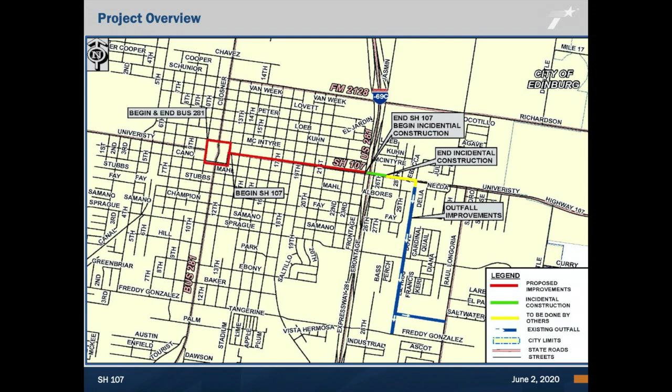The scope of the proposed project includes reconstructing and converting Business 281 around the courthouse square to one-way traffic operation, reconstructing SH 107 within existing right-of-way, upgrading the existing storm drain system, and widening an existing ditch to improve roadway drainage. The project is needed because there is a decrease in mobility, the traffic is slow and congested, and there is a high crash rate. The purpose of this project is to improve mobility, reduce congestion, and improve safety.

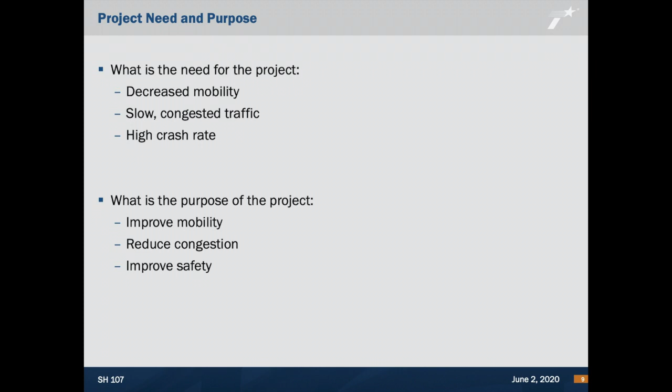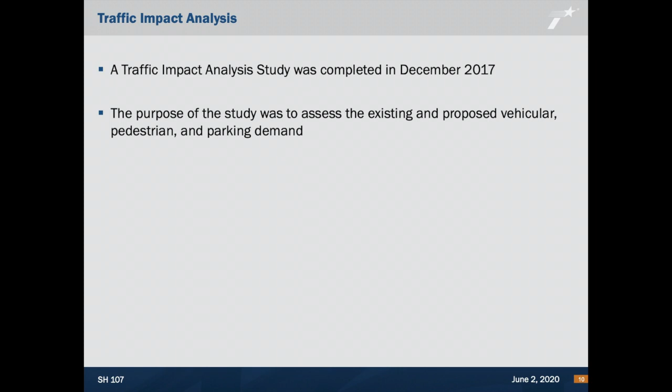As part of the preliminary analysis of the courthouse and surrounding area, a traffic impact analysis study was completed in December 2017. The purpose of this study was to assess the existing and proposed vehicular, pedestrian, and parking demand in the area. The results of the study are summarized here.

There is an increase in demand due to the new Hidalgo County Courthouse, and also because the Edinburg Downtown Master Plan will require improvements as development occurs. The quality of traffic flow on the future street network would deteriorate without improvements. The existing two-way traffic operation would not be able to handle future traffic demands. A one-way traffic operation around the square would provide an acceptable flow of traffic for present and future years.

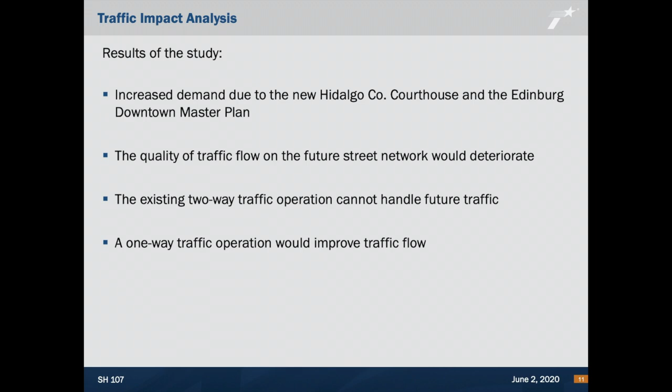Let's take a look at this table. Over an 8-year period between 2010 through 2017, there has been a total of 654 crashes within the project limits. The total number of crashes each year shows a steady increased rate of crashes, with a high rate of those being intersection crashes. The small table at the bottom of the slide shows the average crash rates in the state of Texas and in the Pharr District.

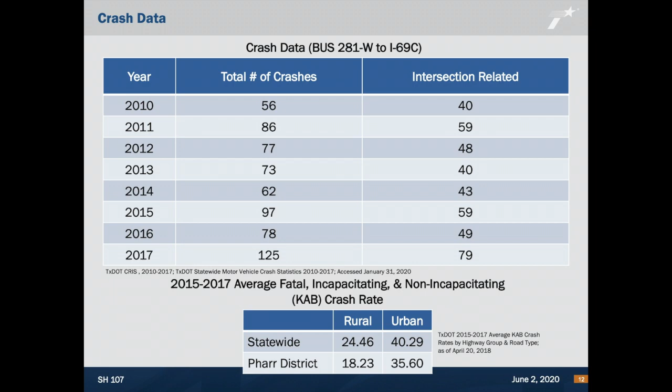Comparing the crash data on this urban roadway for the years 2015 through 2017, you can see that the total number of crashes for each of those years is well above both the statewide and the Pharr District average rates.

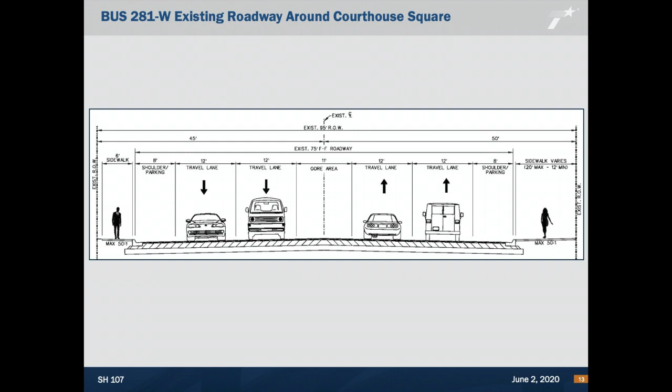The existing Business 281 around the courthouse square is a 75-foot wide road with two-way traffic operation. The roadway consists of 4 12-foot wide travel lanes, 2 8-foot wide shoulders, an 11-foot wide gore area approaching the intersection, and varying 6 to 12-foot wide sidewalks on both sides of the roadway. All of this within a 95-foot wide right-of-way. Drainage is currently handled by an underground storm drain system.

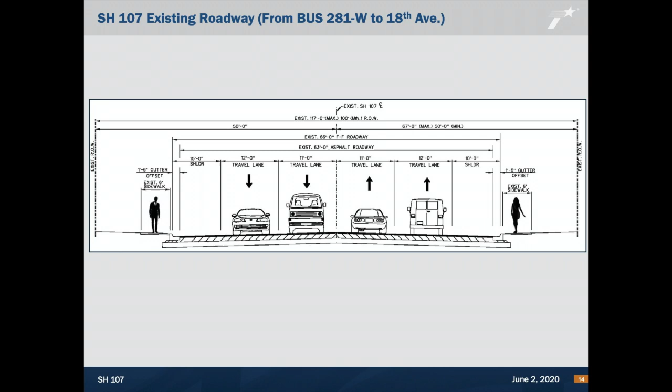SH 107 from Business 281 to 18th Avenue is an existing 66-foot wide roadway consisting of 2 12-foot wide travel lanes, 2 11-foot wide travel lanes, 2 10-foot wide shoulders, and 6-foot wide sidewalks on both sides of the roadway, all within a 100 to 117-foot wide right-of-way. Drainage is provided by an underground storm drain system.

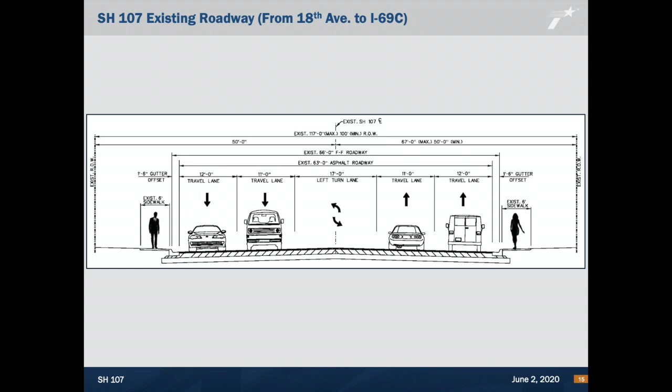SH 107 from 18th Avenue to I-69 is similar to the previous section, however, it includes a left turn lane instead of shoulders. The existing 56-foot wide roadway consists of 2 12-foot wide travel lanes, 2 11-foot wide travel lanes, a 17-foot wide left turn lane, and 6-foot wide sidewalks on both sides of the roadway, all within a 100 to 117-foot wide right-of-way. Drainage is provided by an underground storm drain system.

Two alternatives were studied and considered for this project: the no-build and the build alternative. Evaluation criteria of the alternatives considered impacts to the human and natural environment. The no-build alternative is required for consideration during the environmental study and is carried forward as a baseline for comparison.

Under the no-build alternative, the existing roadway would not be reconstructed or improved. The existing conditions of the roadway would remain the same. No improvements will be made to congestion or safety. The no-build alternative is not recommended because it would not meet the need and purpose of the project.

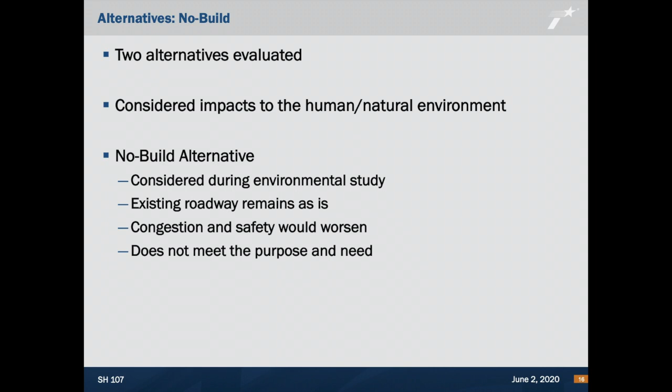The build alternative would convert Business 281 around the courthouse square to one-way traffic operations. SH 107 will be reconstructed within existing right-of-way. The existing storm drain system will be upgraded. An existing ditch will be widened to drain stormwater runoff.

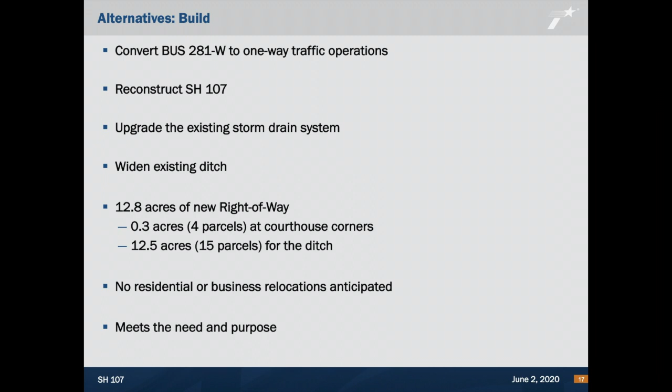These improvements would require a total of 12.8 acres of new right-of-way: 0.3 acres at the courthouse square corners, and 12.5 acres for the ditch. No residential or business relocations are anticipated. The build alternative meets the need and purpose of the project.

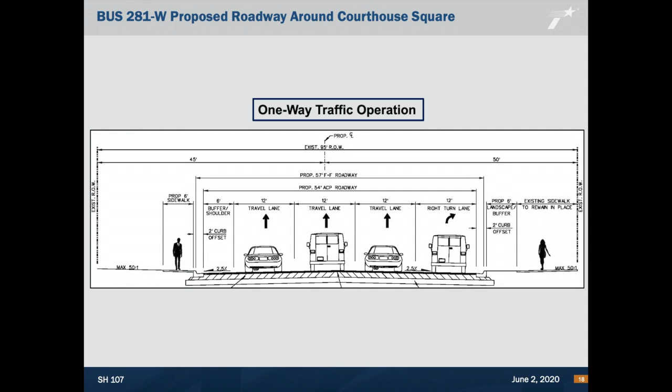Business 281 around the courthouse square will be converted to a one-way traffic operation. The proposed 57-foot wide roadway would consist of 3 12-foot wide travel lanes, one 12-foot wide right turn lane, and a varying 6 to 20-foot wide sidewalk on both sides of the roadway, all within the existing 95-foot wide right-of-way. Drainage will be provided by an underground storm drain system. A total of 0.3 acres of new right-of-way would be required at the corners to improve the turning radii.

SH 107 from Business 281 to 18th Avenue will be reconstructed to a 69-foot wide roadway, which would include 4 12-foot wide travel lanes, 2 10.5-foot wide shoulders, and 6-foot wide sidewalks on both sides of the roadway, all within an existing 100-foot wide right-of-way. The existing underground storm drain system would be upgraded.

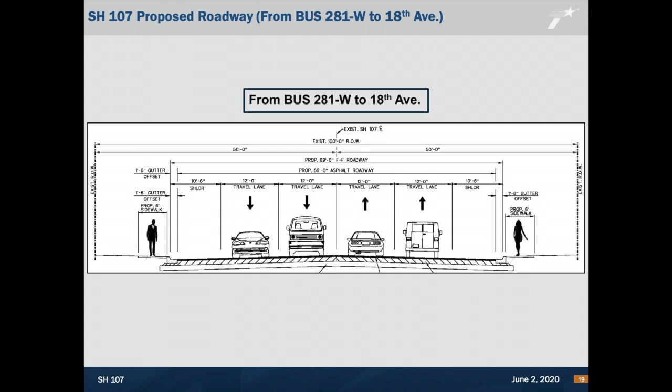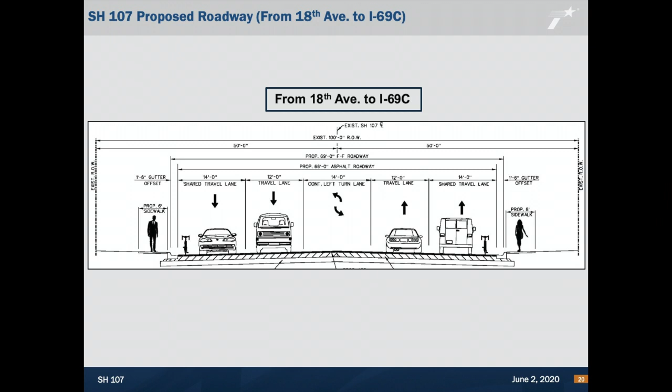SH 107 from 18th Avenue to I-69C will be widened to a 69-foot wide roadway consisting of 2 12-foot wide travel lanes, 2 14-foot wide shared use lanes for bicycles and automobiles, a 14-foot wide continuous left turn lane, and 6-foot wide sidewalks on both sides of the roadway, all within the existing 100-foot wide right-of-way. The existing underground storm drain system would be upgraded and improved. No new right-of-way would be required along SH 107.

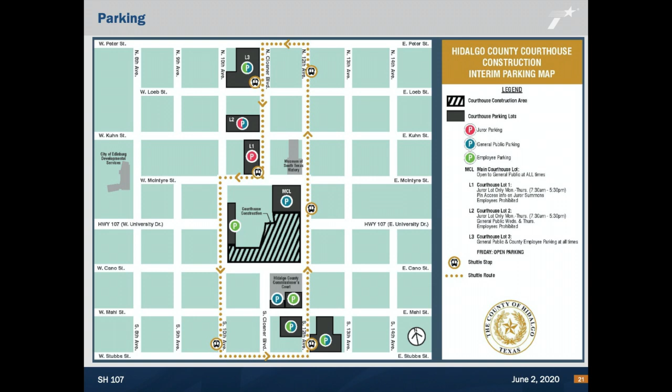Parking is not a part of the proposed project. However, we understand that the public may have questions or concerns regarding parking within the project area. Hidalgo County and the City of Edinburg completed a parking analysis study in 2018 in preparation of construction of the new Hidalgo County Courthouse. Parking along SH 107 and Business 281 has been previously removed. As part of a collaborative city-county plan, new designated parking lots and shuttle routes shown on the map have been implemented to address parking in the area. Should you have any questions regarding parking, please contact your city or county officials.

TxDOT considers effects to historic properties under state and federal regulations.

Because Hidalgo County has already reconfigured the street pattern around the square, and because the consultants will include protection notes in the plans for any work adjacent to historic buildings, the project would not have an adverse effect on historic properties.

The proposed project would include the widening of an existing ditch located approximately 350 feet south of the intersection of SH 107 and Rebecca Drive. The ditch runs south for 4,970 feet, then turns east for 1,636 feet to FM 1426, or Raul Longoria Road. The existing 60 to 80 foot wide ditch will be widened to a varying 85 to 137 foot wide ditch within a proposed 125 to 175 foot wide right-of-way.

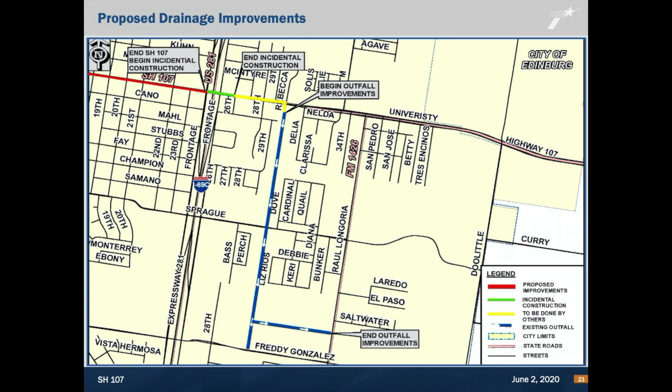A total of 12.5 acres of new right-of-way will be required for the ditch improvements. Hidalgo County will be responsible for purchasing the right-of-way. Hidalgo County Drainage District Number 1 will be responsible for maintenance of the ditch.

In summary, Business 281 around the Hidalgo County Courthouse Square will be converted to one-way traffic operation. SH 107 will be reconstructed within existing right-of-way. The existing underground storm drain system will be upgraded. The existing ditch located south of SH 107 and Rebecca Drive will be widened.

It is anticipated that a total of 12.8 acres of new right-of-way will be required for the project: 0.3 acres for the corners of Business 281 and 12.5 acres for the ditch. No residential or business relocations are anticipated.

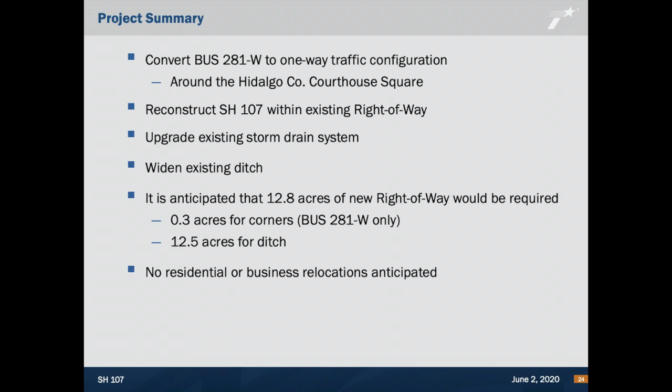Let me provide you now with information on the right-of-way acquisition process to be followed by the acquiring agency, which will be Hidalgo County Precinct Number 2 with TxDOT oversight. Property acquisitions will follow federal and state laws and policies. The Uniform Relocation Assistance and Real Property Acquisition Policies Act of 1970, known as the Uniform Act, is the federal law that is followed for appraisals, negotiations, and relocation of families and/or businesses.

Hidalgo County will be acquiring the additional right-of-way from individual property owners and relocate any families or businesses affected by the project. Independent fee appraisers will appraise each individual property needed as additional right-of-way.

Each affected property owner will receive a certified letter from the appraiser requesting a meeting with him or her in order to inspect the property, and provide them the opportunity to accompany them to perform a pre-appraisal inspection. They will also request permission to enter the property for inspection of improvements. The appraiser will determine the land value, improvement value, and damages to the remainder of the property to be acquired.

With the initial offer, a copy of the appraisal report will be provided. This will be forwarded to the landowner by certified return receipt requested mail, as dictated by state law. The project currently has available money for construction and right-of-way acquisition. The acquiring agency will start the acquisition process once the environmental clearance is obtained.

The property owner can accept the offer based on the appraisal or submit a written counteroffer based on information that can be supported by documentation such as appraisals or bids, which must be submitted by the property owner for review. If for some reason the property cannot be acquired through negotiations, Hidalgo County has the authority to proceed with eminent domain proceedings and continue with a special commissioner's hearing, but only as a last resort.

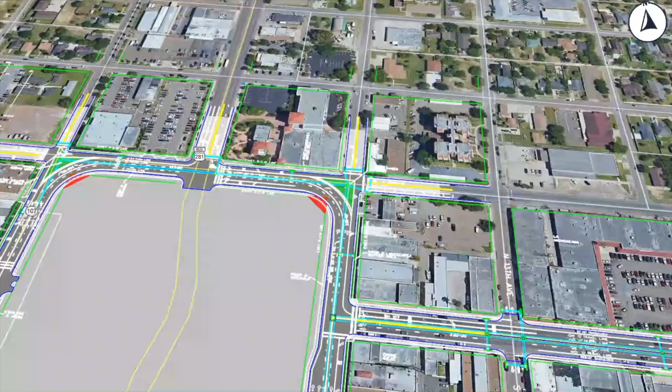At this time, a flyover video of the project will be shown to provide you a perspective of what the project will look like once it's complete. The flyover begins at SH 107 East as you are coming in from Interstate 69C or Expressway US 281. We will continue in a counterclockwise direction around the courthouse square. Continuing towards the north, you can see there are 3 travel lanes, all in a one-way direction.

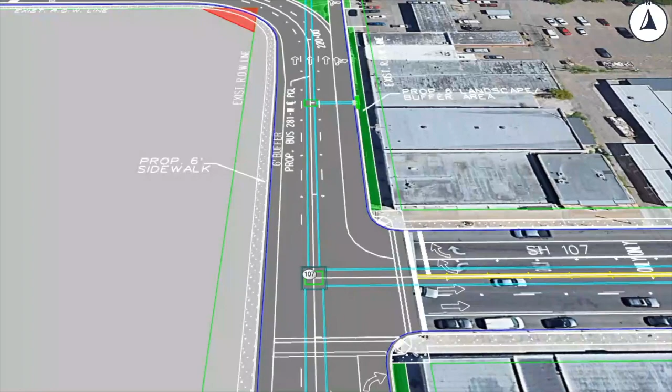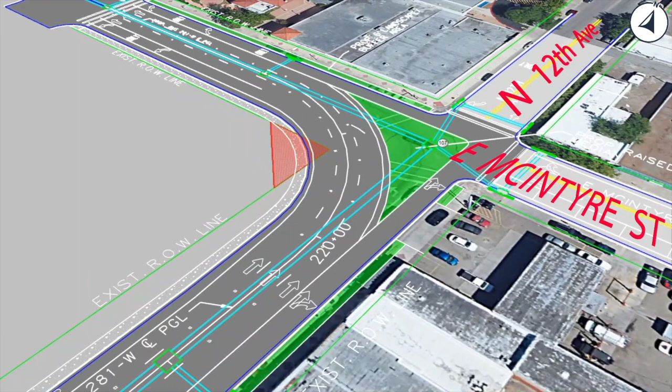The green areas throughout the square are landscape areas, buffers or medians, and sidewalks are shown in gray depicted with white dots. As you proceed, there is a right lane to exit the square. You can continue straight onto North 12th Avenue or turn right onto East McIntyre Street.

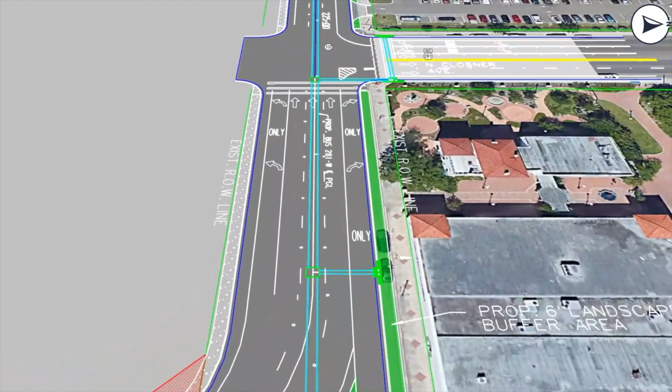The red shaded area on the left is a proposed right-of-way corner clip to accommodate the curve around the square going west. Continuing west, we now approach Business 281 or North Closner Boulevard on the right.

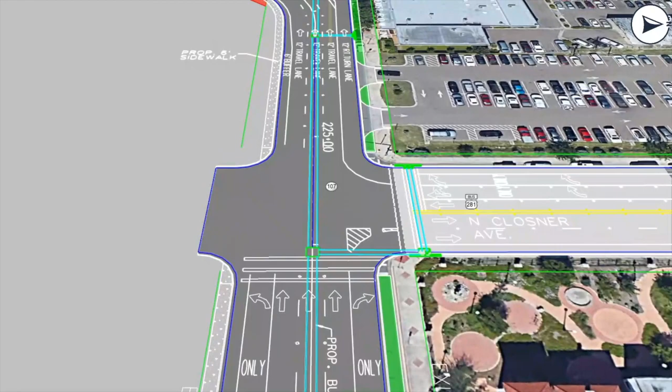You can see there is a left turn lane to enter into the courthouse driveway entrance, 3 lanes going straight, and 1 turning right onto North Business 281.

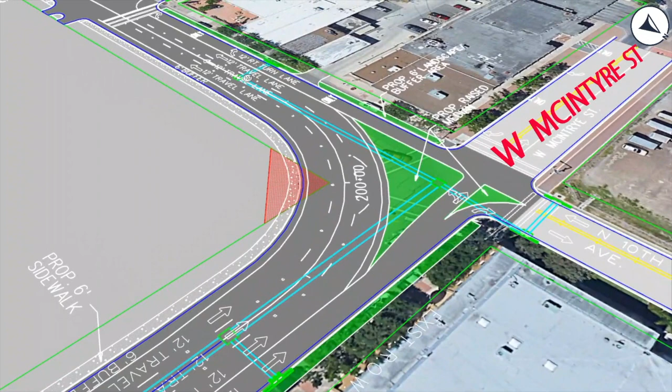As we approach North 10th Avenue, 3 lanes continue with 1 lane exiting the square. The lane continues straight onto West McIntyre Street and/or turns right onto North 10th Avenue. The red shaded area is the proposed right-of-way corner clip to accommodate the curve around the square going south.

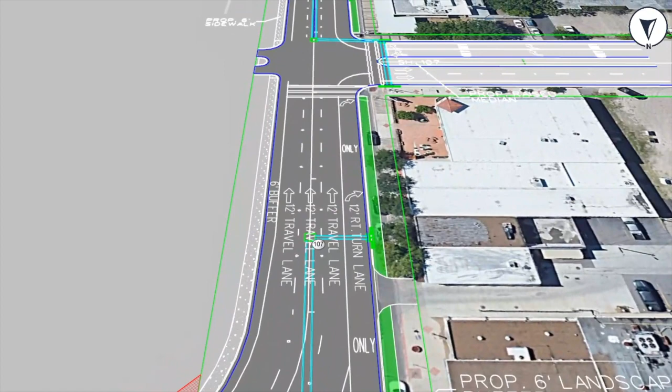We continue south with 3 travel lanes and a right turn lane as we approach SH 107 or University Drive. As we continue south and approach West Cano Street, 3 lanes continue with 1 lane exiting the square.

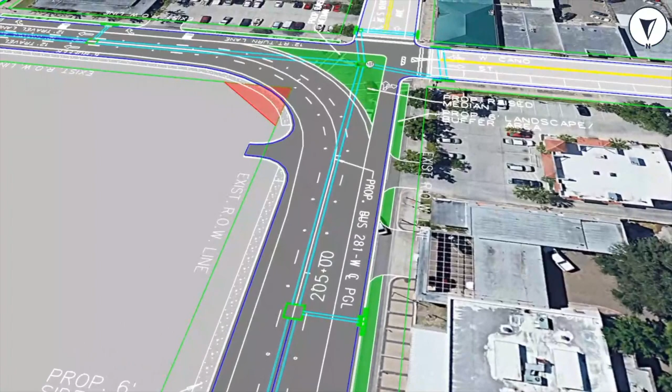The lane continues straight onto South 10th Avenue or can turn right onto West Cano Street. The red shaded area is a proposed right-of-way corner clip to accommodate the curve around the square going east.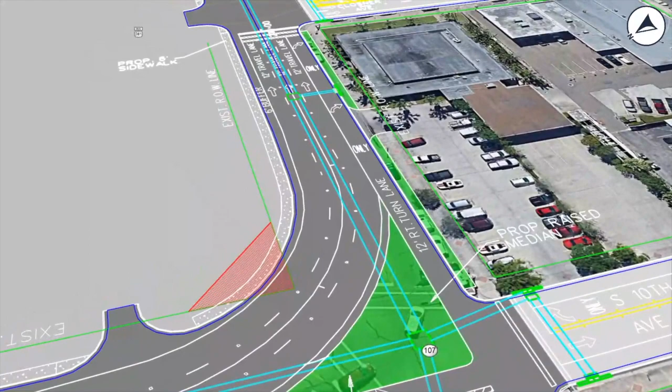We then continue east with 3 lanes and a right turn lane as we approach South Business 281 or Closner Avenue. As we continue east and approach East Canal Street, 3 lanes continue towards the north with 1 lane exiting the square.

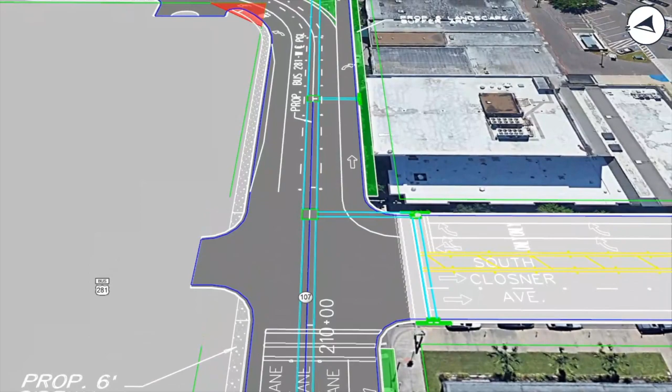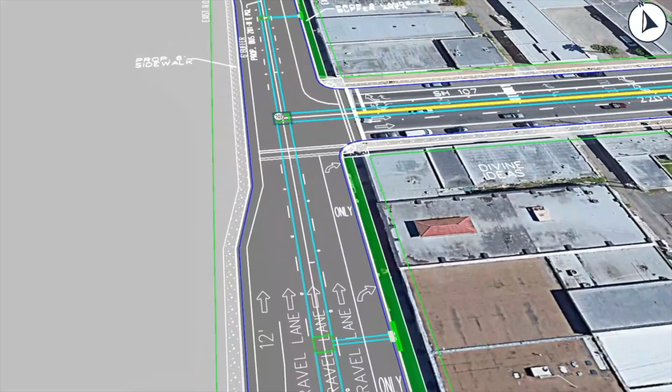The lane continues straight onto East Canal Street or turns right onto South 10th Avenue. You can see there's a left turn lane to enter into the Courthouse Drive entrance. The red shaded area is a proposed right-of-way corner clip to accommodate the curve around the square going north.

We are now back to SH 107 East where we originally started. We will now turn east onto SH 107. This portion of the project will be constructed entirely within existing right-of-way, shown here by the green lines.

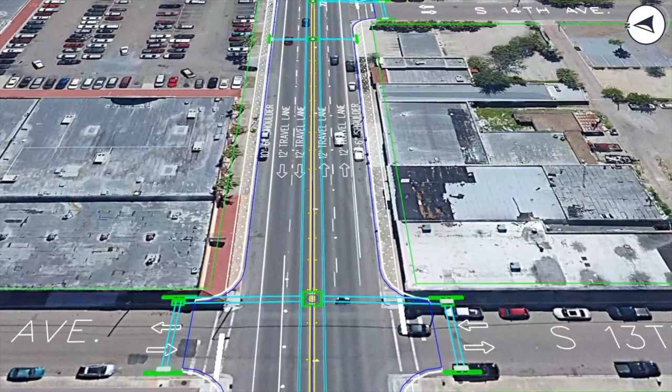As we continue east past 13th Avenue, you can see there are 4 travel lanes with shoulders and sidewalks on both sides of the roadway. As we continue past 15th Avenue, you may notice blue lines in the center of the roadway. This shows the location of the upgrade to the storm drain system being proposed within the project limits.

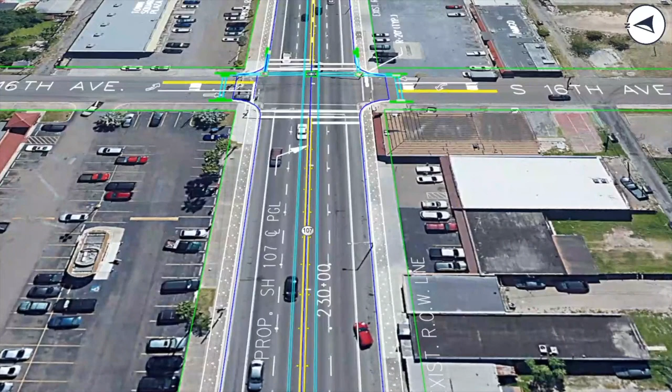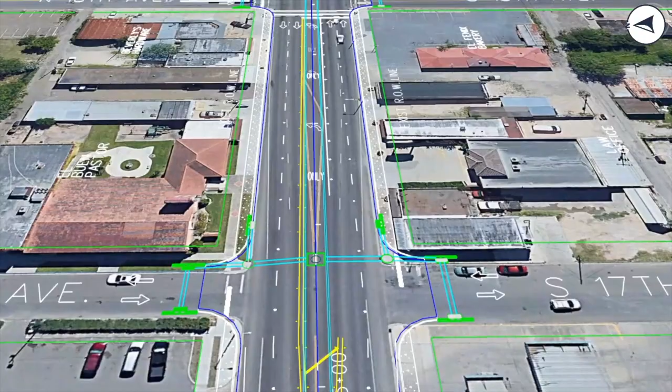As we pass 16th Avenue, you can see that the roadway transitions. The shoulders are eliminated and a center turning lane is added. The roadway would now consist of 4 travel lanes, a center turning lane, and sidewalks.

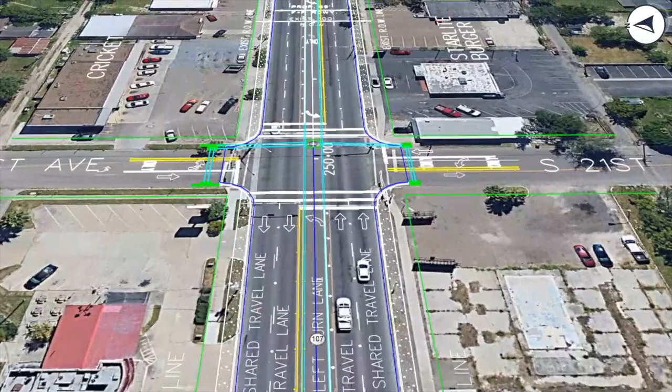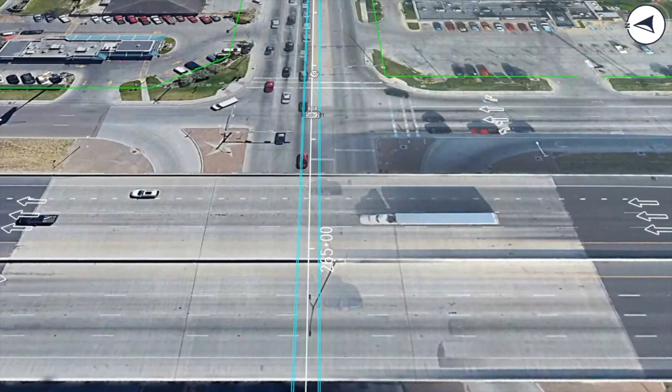The reconstruction of SH 107 ends at the Interstate 69C US 281 West Frontage Road. From the West Frontage Road east to 26th Avenue, the storm drain system, depicted by the blue lines, would transition to connect to TxDOT's existing storm drain system east of the expressway.

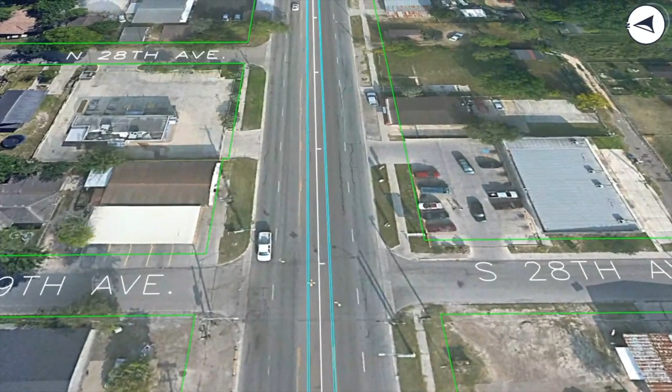The drain system would continue east to Rebecca Drive, then continue south to connect to an existing drainage ditch shown in purple. As part of this project, the existing ditch will be widened, shown in white.

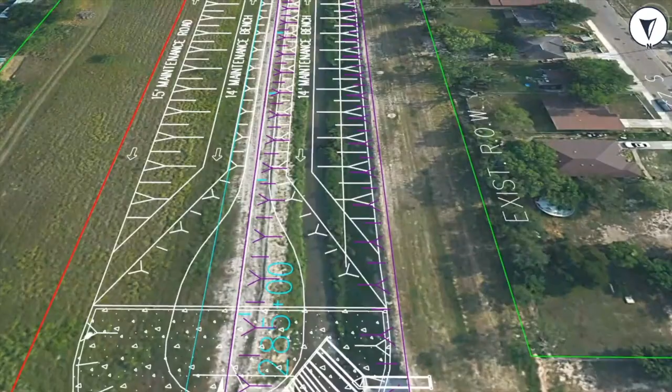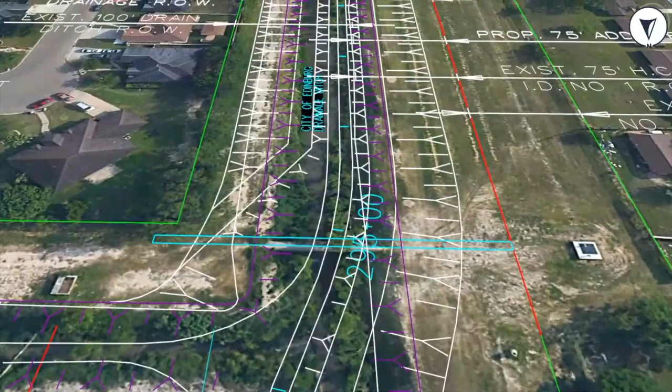The red line on the left side of the screen depicts the additional right-of-way needed. The ditch continues south for 2/10 of a mile. Here, you can see that the proposed right-of-way switches to the west side of the ditch, or the right side of the screen, to avoid potential impacts to residences.

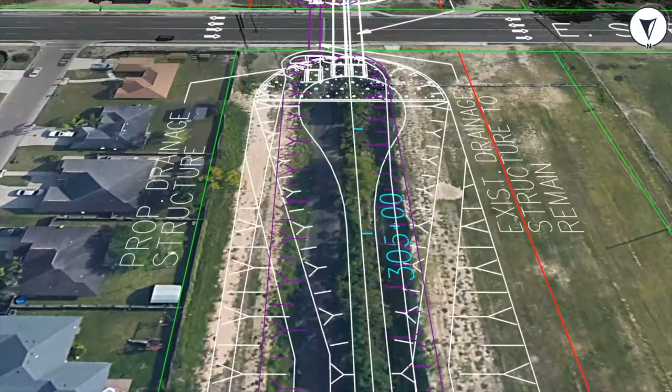The ditch continues south, crossing underneath East Sprague Street, continuing south for approximately half a mile where it ends at Freddy Gonzalez Drive. Just north of Freddy Gonzalez Drive, the ditch branches to the east.

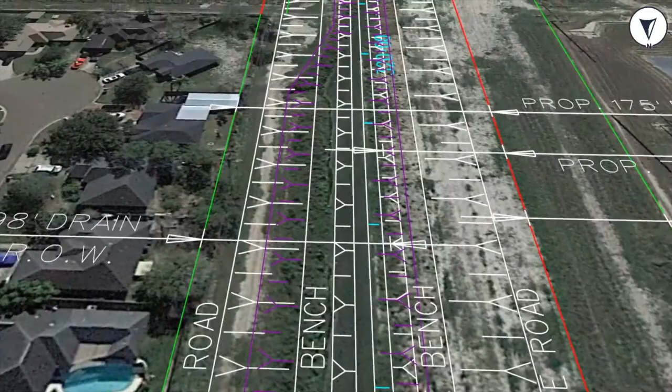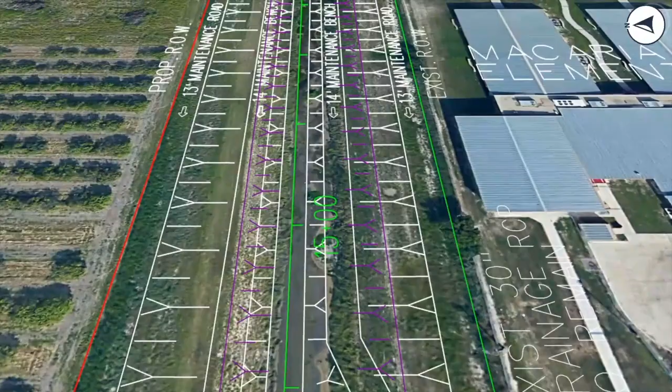In this area, the proposed right-of-way will be acquired from the north side of the ditch, or on the left side of the screen. The ditch will be widened for 3/10 of a mile to Raul Longoria Road. The ditch widening ends at Freddy Gonzalez Drive to the south and Raul Longoria Road to the east.

This concludes this video presentation of the project.